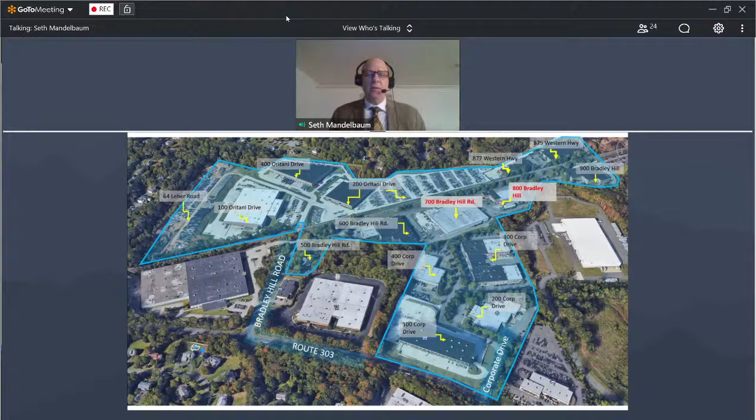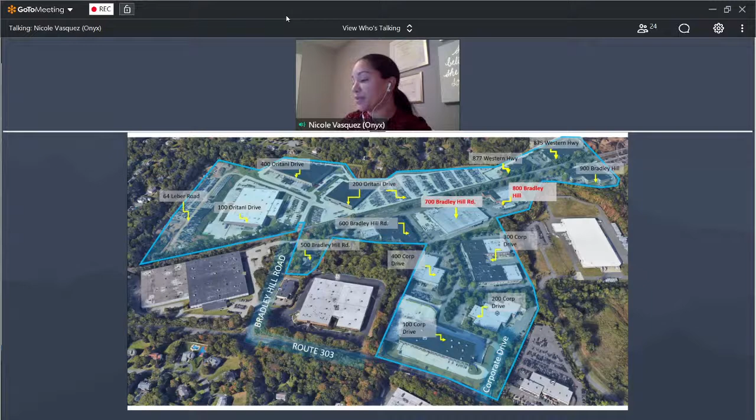Thank you, Seth. Again, my name is Nicole Vasquez, I'm with Onyx Equities. The two applications before you are for properties within the Hudson Crossing Industrial Park. The 700 Bradley property is improved with a commercial warehouse building currently occupied by Deman Motorsports and Oak Beverages. Deman Motorsports will remain as a tenant in the facility. Oak Beverages will be vacating, and UPS will be reletting part of the spaces that Oak currently occupies, as well as some of the vacancies that currently exist in the building.

800 Bradley Hill Road, currently occupied by Oak, is really only part of this application because, as you can see in the grayed out area here, the owner of 800 Bradley Hill Road will be granting an access and parking easement to the owner of 700 Bradley Hill Road, to the benefit of UPS. This slide also shows the existing conditions of the site. The application primarily proposes milling and paving and restriping, with a few ancillary modifications to the building, which we'll discuss in just a moment.

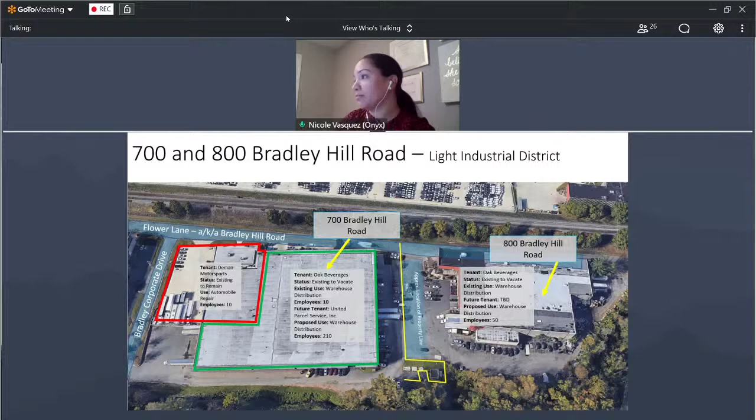This slide shows the distance of the 700 Bradley Hill Road building UPS will occupy to the nearest residential districts, with the nearest district boundary line approximately 430 feet from the boundary of the 700 Bradley Hill Road building. Similar data points to the south of the building and out to the east. Also important to note that the building is across the CSX rail line and across the 200 Orangetown parking lot before you get to that first residential district property line.

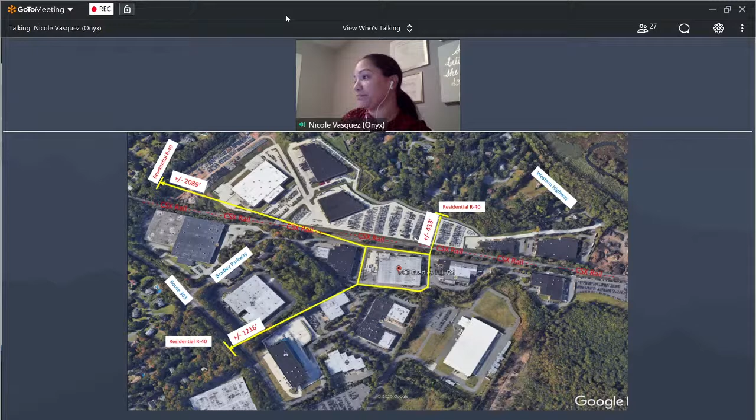As you can see here, these are the proposed striping patterns for both of the properties. The area in gray is the parking and access easement I spoke about a moment ago. In these clouded areas, we took into consideration AKRF's recommendations for some of the improvements, better clearance in the overhead door drive-in lanes into the 700 Bradley Hill Road building. We made some modifications down in the southern corner to allow for better maneuverability of the trucks into the existing loading docks, and some changes of swapping of spaces to account for the changes proposed by AKRF, which I'm sure you will hear about in just a moment.

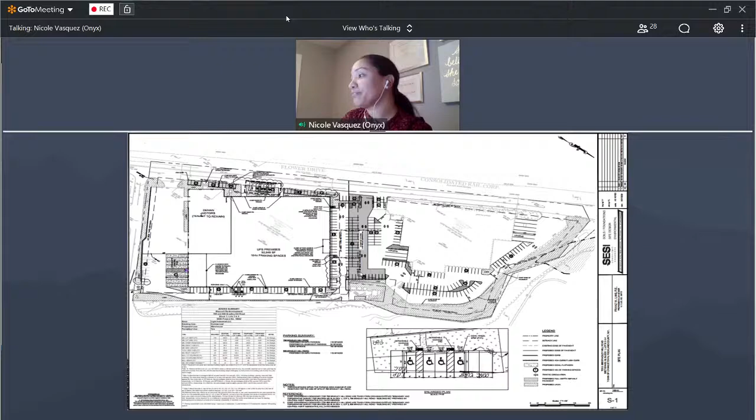Aside from the milling and paving, the other modifications we're proposing are removing a surface-mounted fuel tank, a site access gate, an extension to the rail spur on Bradley Hill Road, and replacement of the existing loading dock doors on the southern side of the building. These are the 8 existing loading dock doors UPS will be using, currently used by the existing tenant. No changes, no additions or subtractions of loading dock doors, just widening of the openings for UPS's use.

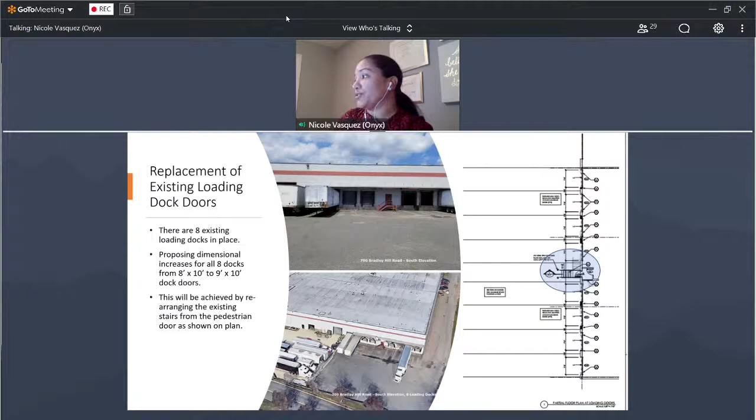And here is a rendering. Well, no, first an existing condition picture of the lot, and the rendering underneath showing the proposed changes once they're implemented as well.

And that is it. Thank you, Nicole. So, Chairman, essentially that is our overview. Of course, we're happy to answer any questions that the board or the public might have this evening. And we would ask the board to consider granting final site plan approval this evening at the end of the public portion of the meeting.

Thank you so much. Okay, thank you. Is there anybody else from 700 Bradley wishes to speak on this? No? Okay, so we'll go on to the consultants' reports.

Jane Slavin, February 8th, for 700 Bradley Hill Road. She has one comment.

Okay, Bruce Peters, February 8th, has 2 comments, which I want to read in, and we're going to need some legal clarification on this. Number 1, contrary to the applicant attorney's letter of 1/7/21, page 2, paragraph 3, it is not typical for applicants to wait until receiving final approval to address comments from this department, nor is it typical for this department or the planning board to allow an applicant to ignore comments made at a preliminary stage until after they receive final approval.

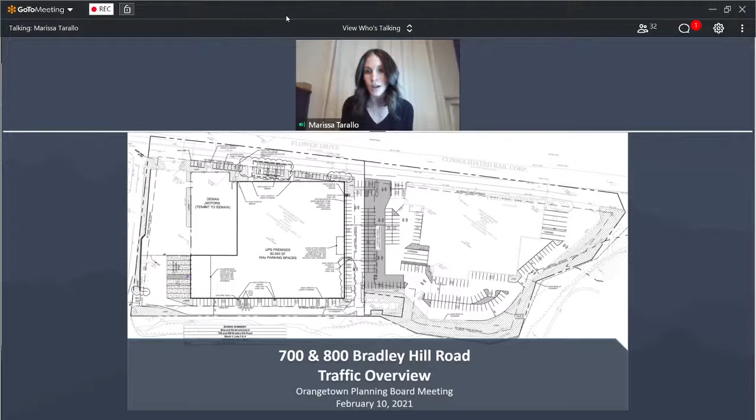And that's when we issued our second January memo, which signs off on the site plan. So I'll go through this quickly, you've laid this out. We've provided 2 reviews. The first review, we requested a revised traffic study based on our round of comments. They provided that revised traffic study, which we signed off on. We then got a subsequent site plan, and we signed off on that as well.

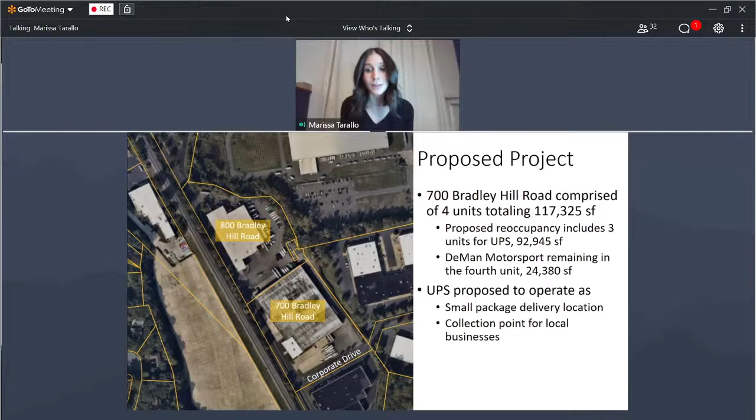The proposed site, they've introduced that to you. What's key for us is that the proposed operations are primarily a small package delivery location with an ancillary secondary collection point for local business.

They looked at 3 traffic study intersections. These 3 intersections are along the state route. They're the busiest intersections. They're very similar to what was analyzed for the Amazon facility as well. They used the same data collection previously approved under the Amazon site, which was collected during appropriate times, and we concluded that data was sufficient.

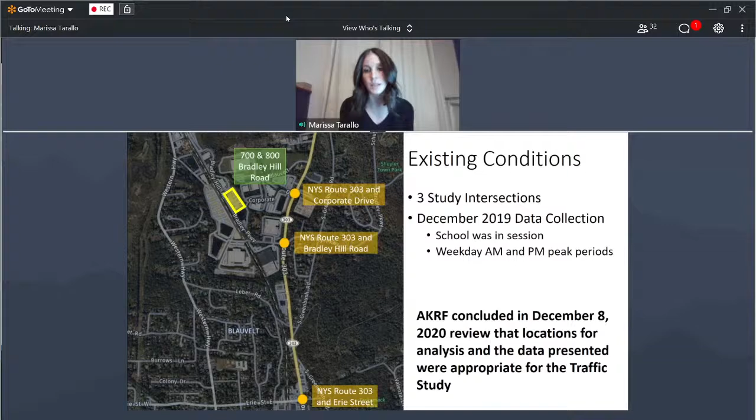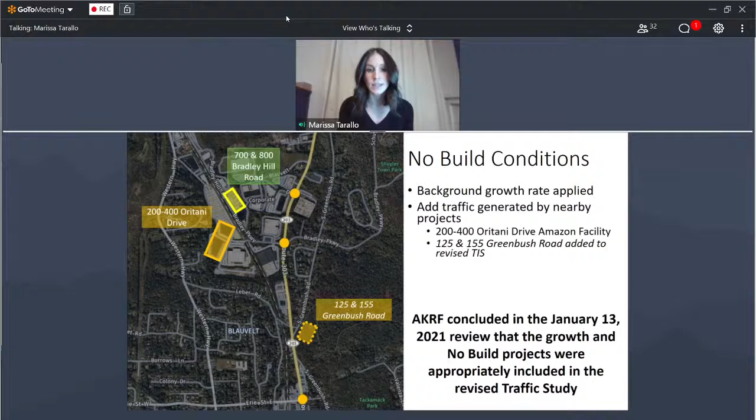For the no-build analysis, they applied the same background growth rate as the Amazon site, and added traffic generated by nearby projects. The original traffic study added Amazon, and then our response memo requested they add in the 125 and 155 Greenbush Road, which they added in their revised TIS. We then concluded in our secondary memo that this no-build project was sufficient.

There was some discussion about the trip generation. Unlike some of the other sites you're looking at with 155, where you're using ITE, UPS is a very specific use, so they provided a very detailed trip generation hourly throughout the entire day of vehicles going in and out. We checked that against the national average for warehouse facilities to make sure it's in line. In this case, it's more conservative than the national standard for a general warehouse, which is what we would expect with a UPS or an Amazon. So it was good data.

We asked for information about when people were coming in and out so we could line it up along their 24-hour distribution. As mentioned, they have a preload and then a delivery. The delivery is really what's going to start overlapping. The end of preload and the beginning of delivery overlap with your peak commuter hour in the AM. Then they've got staggered returns with less drastic vehicle volume, and then a local sort with no operation overnight.

One of the keys was that the ancillary package drop-off was part of our questions going into the final review. We had a conversation with the applicant's consultant right before we issued our final review, and the goal of that site is not to be the UPS store you think of, where you'd go buy boxes and send Christmas presents, with a lot of residents potentially frequenting it. It's supposed to be a collection point for local business, so they're only anticipating 25 customers per day. As long as that is the anticipated use and how they're going to operate the site, their trip generation is sufficient, and that's what we found in our memo.

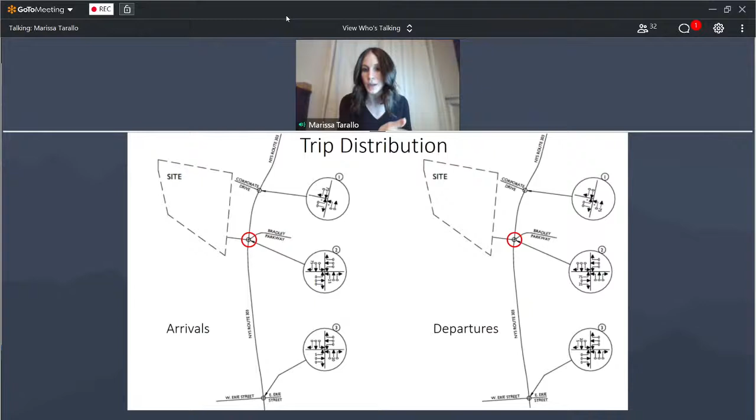They distributed the trips mostly from the north, with 3/4 from the north and 25% from the south. That's in line with the existing traffic and in line with all the uses in the area. This use is very similar, so it should really follow the existing patterns.

They analyzed it using all the latest methodology. We asked them to revise it for the volume of trucks, the percentage of trucks now on this roadway that they're contributing to, and they did that for both the no-build and build analysis. We also asked them to use the New York State DOT signal timing plans, which they revised for.

What's key - I know you mentioned you didn't get a comment letter from State DOT. We review everything to State DOT guidance, and we actually spoke with DOT about the signal timing plans to get them. Unfortunately, that's not the person who issues the letter to you, which is why you still don't have a letter. But they were kind enough to note that the signals are operational there and they don't have any immediate concerns that need fixing. Amazon is already upgrading one of the intersections, I believe at Bradley Hill Road, that traffic signal slightly. So the state was satisfied they had what they needed to operate with this development from an operations perspective. To my knowledge, it has not fully gone through their permit division separately.

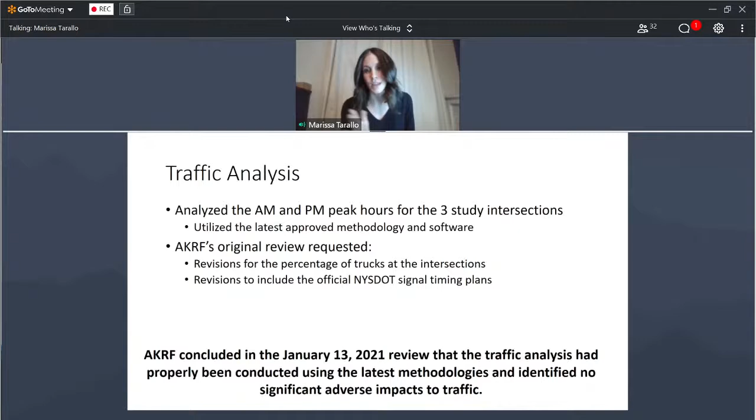We also asked for a crash assessment. This is standard on a state DOT roadway - it's standard that New York State DOT should have requested it. Mainly, we just wanted it documented for you. Route 303 is a very crash-heavy corridor, and luckily for the applicant, at the moment this is not one of the high accident locations along Route 303. I know it looks like a lot of crashes, but that's over 4 years, so it actually doesn't meet New York State DOT's criteria for a high accident location. But we want it documented and noted in all the studies so you can stay informed as to whether crashes are getting worse with added development over time.

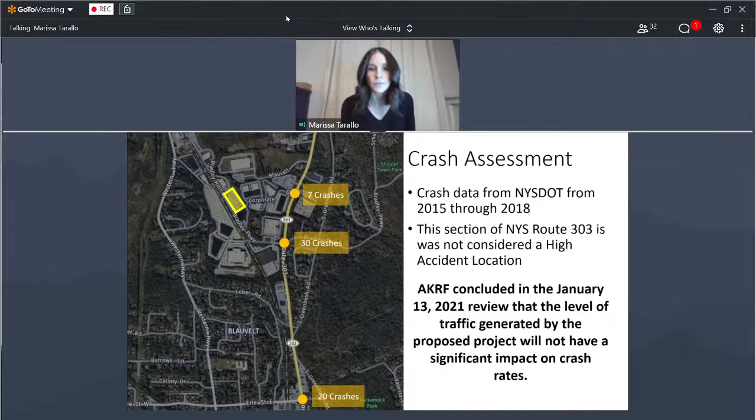And then we review their site plan and the truck turning analysis, and these are the locations we were concerned with. It wasn't so much that they were clipping the neighboring parking spaces, but particularly because the neighboring parking spaces to the two drive-in aisles had handicap spaces. We just wanted to make sure someone wasn't getting in their car when a UPS truck was coming out that might have been dropping off a package. So they widened that and moved some of the parking spaces back.

Also with their loading dock, they were extending the island in. Normally it's nice to have more islands, but in this case it was interfering with the truck turns. So they cut the island back, and now their truck turns are not in conflict with the islands they were going to build.

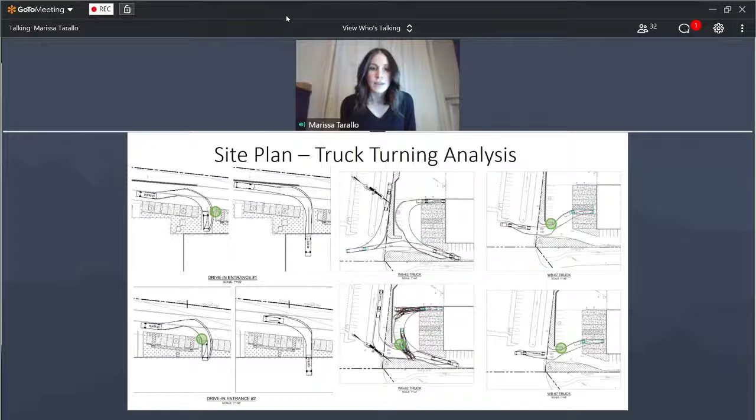And that's what's shown here, their revised plan that they bubbled in their resubmission to you on the 28th shows both of our improvement requests documented on their site plans that they'll incorporate. So our conclusions were that the traffic study was approved for our standards and New York State DOT standards that we follow, so long as the operations are as described, where you're not looking at a large UPS store where residents and others are coming very regularly for packages, and that there's no additional development on the site in 2026.

So I don't know if there's any questions. That's all I have regarding our memos.

I can see Mr. Dell has a question. Yes, let me go down. One second, Mr. Chairman. Marissa, can you stop sharing your screen so everyone can get the full view back? Yeah, great, thank you. Sorry about that. Thank you, Marissa. All right, great presentation, thank you very much.

Let me go down to all the board members and see if anybody has any more questions for you. Mr. Young? No comments, Mr. Chairman. Thank you very much. Mr. Mandel? No comments, Mr. Chairman. Thank you very much. Mr. Sweeney? No comments, thank you for the presentation. Thank you very much.

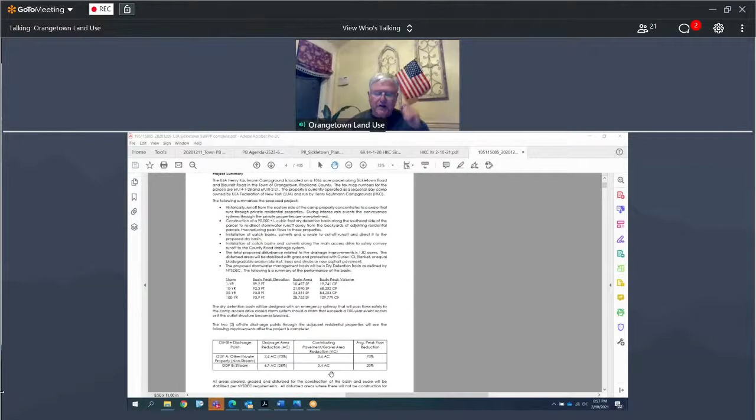Okay, well, let me go through the comments that we have, and I'll open it up to the board members, and you can answer their questions if they have any. Sounds good. Okay.

Office of Building, Zoning and Planning, Jane Slavin, February 8th - she has one comment. Bruce Peters, January 9th, has 13 comments. Drainage calculations have been provided that demonstrate potential significant impacts with respect to drainage have been mitigated. We therefore recommend that the Henry Kaufmann Campground Site Plan, Sickletown Road drainage improvements, be approved for drainage subject to the above project comments, of which there are 5. Rockland County Planning, January 20th, has 8 comments.

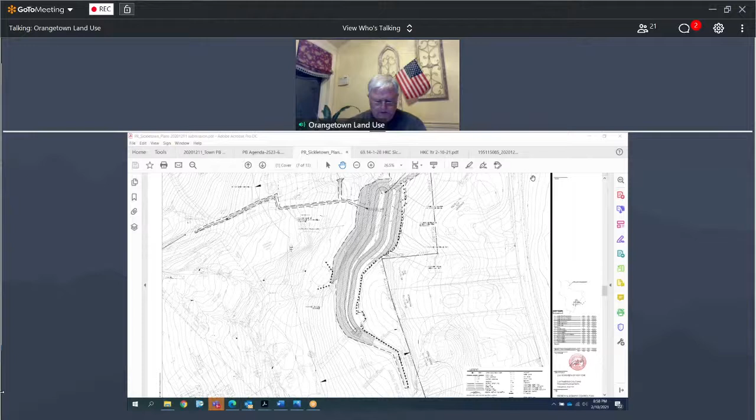I have a letter from Robert and Jacqueline Beers at 81 Sickletown Road. Regarding the drainage of the Kaufmann campgrounds, they state we have been flooded from the campgrounds since 1970 because of the runoff of wetlands that were made into ball fields, etc. Now that they are making a drainage retention pond, we should be included in that change. This is an environmental tragedy that has been occurring for many years.

I have a letter from Rockland County Highway Department saying no comments at this time. I have Rockland County Drainage Agency, dated September 17th, stating the review process is completed and this permit application file is now closed. I also have other letters that are not part of this, or have been satisfied - one from Rockland County Drainage, dated June 22nd, for 92Y and Camp 12 Trails. That's a different project, not this one. Yes, I understand that, I just got it. That's all I have.

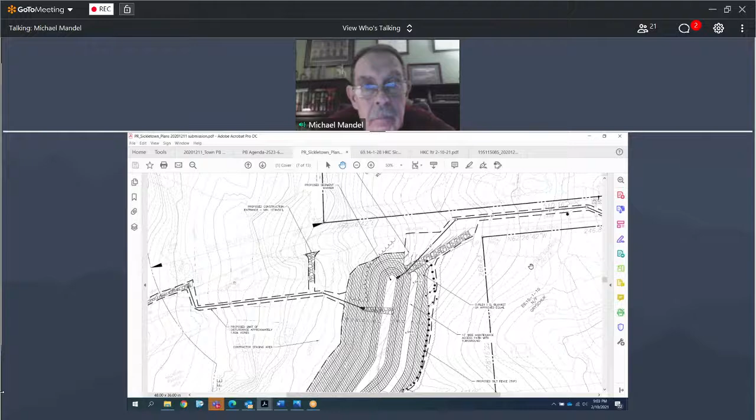Yep, this is an emergency spillway, which under conditions up to a 9-inch rainstorm should never see any flow of water. The purpose of the emergency spillway is in case there's a blockage of the main pipe network that discharges water through the pipe system into the county street drainage system. So this should hopefully never see a drop of water flow through it.

However, as you can see, we show this - it's basically a riprap lined trapezoidal swale that comes to the edge of, this is the main access drive into the camp off of Sickletown Road. So what Bruce has asked for is to show a little more detail at this connection point. He feels like we don't show enough detail that this water, if it were to come through here, would actually run down through this property here.

So he's asked for a little more detail here to extend the riprap and the contours to show that it, without a doubt, would be directed down the drive. Because that's the purpose of this - to alleviate any emergency flows in a controlled manner, down the paved driveway, which has an asphalt curb along it. So it would safely come down and flow into new catch basins we're putting in here at the street.

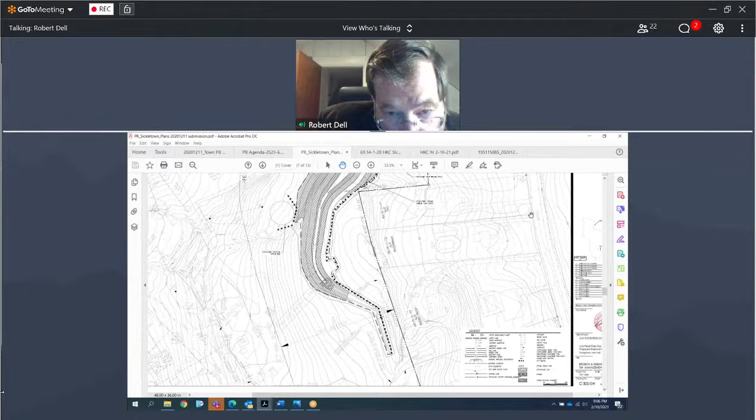Sure. If my reading of this is correct, there still is at least a swale the length of the De Beers property, or almost the length of it, that feeds into this. Is that not true, or am I wrong? That's correct, that's right. Okay, and what is the depth of that swale?

Approximately what, about a foot and a half? Well, it tapers to grade here, so this starting point is probably about a 2-foot swale. And then it increases in depth as you go, to 6 to 8 foot as you get into this area here.

This is an Army Corps regulated water course in this area here, and that's regulated for starters. And secondly, we looked at trying to divert more water from this area into this location, but then we end up overwhelming the system and sending too much water to the county's pipe up here.

I sort of understand what you're saying, but an extra 15 or 20 feet, I don't think would do that unless there's extremely heavy sheet flow there during rainstorms. Yeah, I think it's more - well, we can take a look at it, but you can see here from the contours. Even, let's say, throw a little bit of a berm or something close to it.

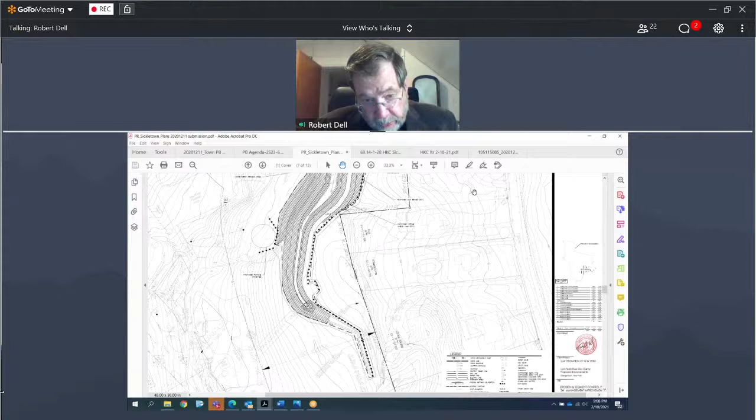The other thing is zero net increase in runoff. That doesn't mean you're going to get any less water from a flood. It just means during the worst times you're not going to get overwhelmed, but you're going to have more water coming through for a longer period of time than you would perhaps in another situation. I think you would agree with that, correct?

I'm not sure if I completely followed you. Okay, it just has to do with the definition of a 100-year storm. No, I agree with that.

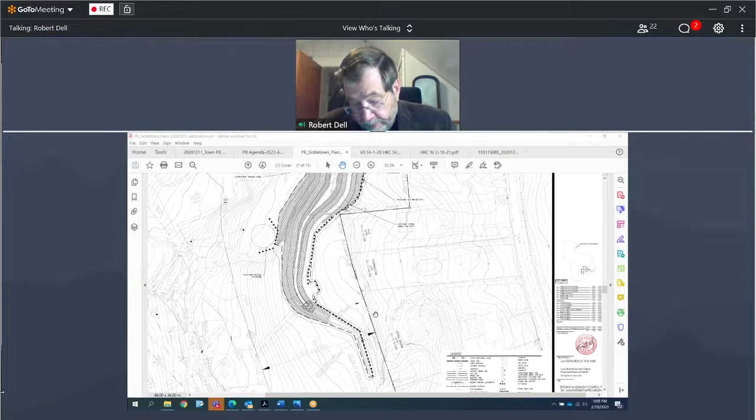And in fact, I explained to the board at our last meeting a couple months ago that DEC has updated their rainfall tables that we use for this, because a 100-year storm, for example, in this area, maybe used to be a 7.5-inch rainstorm. Now it's 9.0 inches of rain. So it's a fact that rainfalls are becoming more intense and higher amounts of rainfall. So DEC's already accounted for that to a certain extent.

Okay, and we'll see how long it takes them to update them again, basically. Yeah, right. But rather than having it all run across as a flash flood, you just have what could be described as high water for a fairly long period of time.

And that's the purpose of a detention basin: basically to capture the water, to hold it, and to send it out as a smaller orifice or pipe, which we're doing here. But instead of having a detention basin that lets it flow back through this location, we're actually redirecting it. So we're taking it one step further to send it in a different direction to a different outlet.

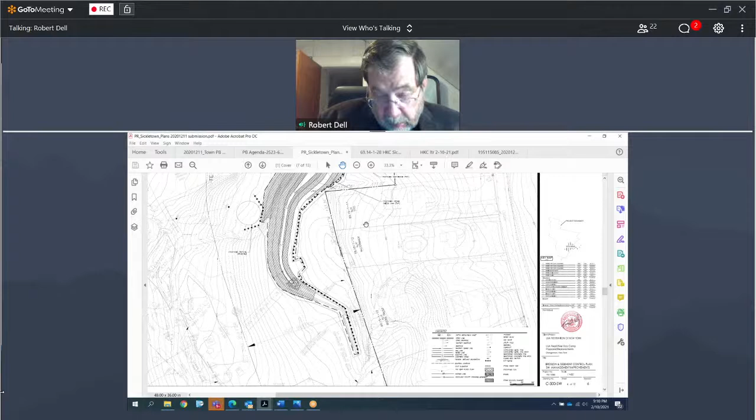Right, well, that's what I was alluding to. And of course, Peters' comments on the end of the riprap, I think, is certainly very accurate. Well, I think that makes sense. It looks like you've done a lot of work on it. It's certainly a lot further along than when it first came in. Thank you. Yeah, no, we're proud of it.

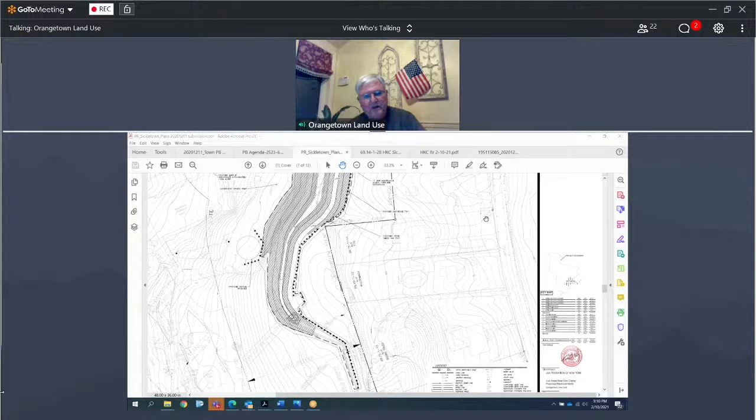Mr. McCrory. Thank you, Chairman. Just a couple of comments. You know, it looks like a lot of work and a lot of experts have chimed in about this plan.

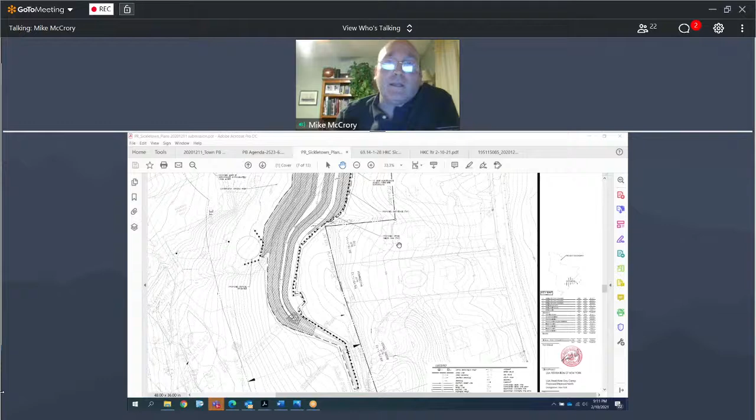But in a layman's kind of term, the flooding and the runoff issues to those neighbors - is this plan going to alleviate all those problems they had with the flooding?

It's not going to prevent them. No, it's going to hopefully lessen the frequency of those events and also the severity of them. Yeah, that's, you know, all right.

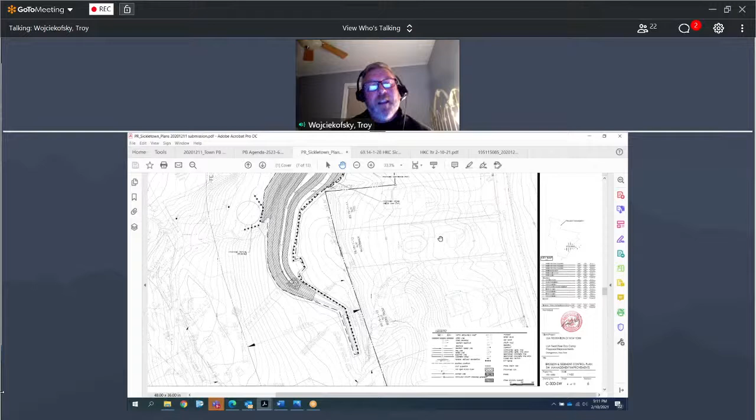The applicant, the campground, is spending hundreds of thousands of dollars to build this basin, unrelated to any of the other applications and projects we're doing at the camp. We want to make this as effective as we can, but in a situation like this you have certain constraints, like when property is landlocked by residential properties, plus other constraints including Army Corps wetlands, while also balancing maintaining wooded buffers to the neighbors.

One thing I did before we submitted this last time in December was meet with the engineer from Brooker to review this in detail, to explain all the different alternatives we looked at, as we presented to the board last time. We looked at other areas of the camp to put basins, other cutoff techniques, and quite a few different alternatives. I reviewed those again with the Brooker engineer who reviews the storm design, and I think he agrees we're doing the best we can here based on all the constraints against us.

All right, thank you for the answer. You're welcome. And just a last thing, you have no issues with Bruce Peters' 13 comments?

No, I call those cleanup comments. There's nothing serious technically with any of those comments. It's a lot of just cleanup, as we discussed, just cleaning up little details like that. We're comfortable with those comments.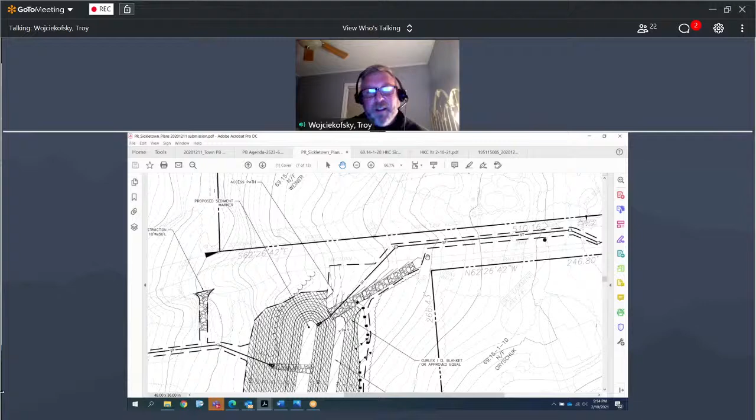Just a minor one, that's what we just discussed over in this area. He's talking about this area here. So we're going to show the riprap extended right to the edge of the road and make sure the contours show the water going down the drive. That's a little detail right there, not a change to anything else. The plans will change a little bit, but it won't affect the overall design.

No, not at all, not at all. All right, that's my only comments. Thank you. Thanks. Thank you.

Mr. Bond: I know Cheryl had forwarded us a picture of what looked to me like the entrance road from Sickletown Road, and on the right side of that entrance road there was a ditch. The picture showed that ditch looking like a river running down it right onto Sickletown Road. So is what you're proposing going to eliminate something like that from happening, or is that still going to happen?

Your microphone's off. That's on. Thank you. Not the first time I've done that.

Okay, sorry about that. So I pulled up one of the photos here that shows that ditch along the driveway, and there's substantial water runoff going down that ditch, and it looks like there's a 2x10 that runs along the driveway. Right, which is actually doing a pretty darn good job, to be honest. It's contained, but that's a ridiculous amount of runoff going down there.

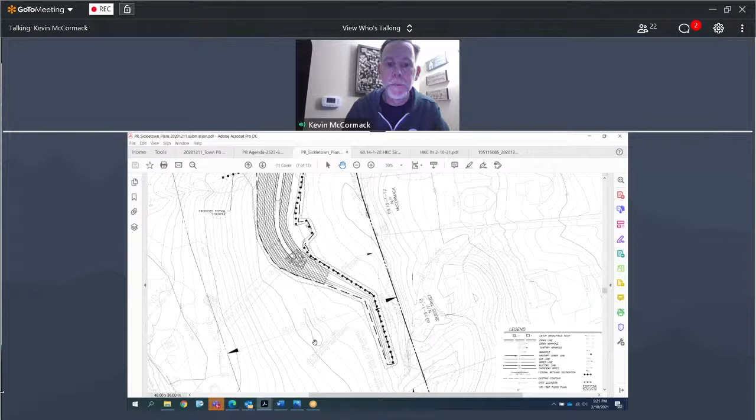More importantly, this isn't in Troy's paperwork here, but in the paperwork provided with the agenda today, I went through that, and there were two documents, two PDFs, which showed the tree removal for the basin project. On page 4 of the first document, it lists all the trees that are there and what trees are going to be removed.

One question we had was, it doesn't appear to have all the trees that are along our property on it. It just seems to have trees close to where the basin is going to be. We wanted to clarify whether the trees closer to our property line just weren't surveyed or not.

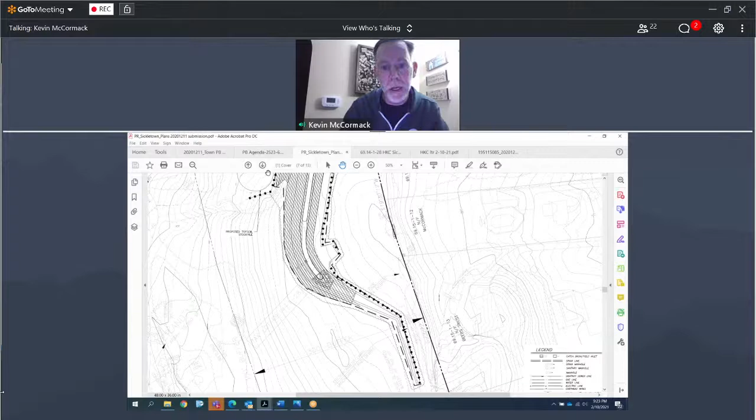But more importantly, there's a significant number of trees that are going to be removed where the basin is, behind the Tito property, the McCormack property, and the Beers property. I didn't count, but it's at least 25 to 50 trees, if not more. Yet there are no trees going to be planted behind those properties. So if we're going to remove that many trees, we would request that some be planted there to continue the look of the back of our properties, because there's only a couple of trees right in the corner of the Tito property.

I think one or two are going to be planted. So I think those were the biggest concerns that we had.

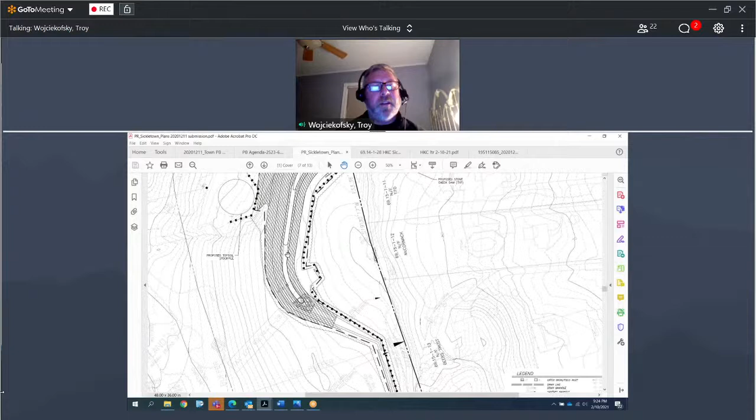The second question was regarding the trees. The town's ordinance requires us to survey trees of 8 inches and larger that will be removed, so we did not survey all of the trees. For instance, in this area, we focused on just the limits of disturbance that would be impacted by the project. So there are certainly more trees in these areas that you can see my hand in right here.

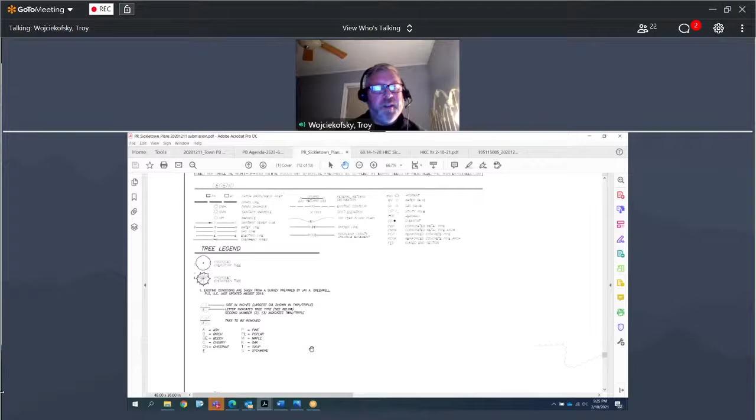These circles are existing trees that were surveyed, 8 inches or larger caliber. These darker symbols are the proposed plantings as part of this project. I can show you the types: we're planting ash trees, birch, beech, cherry, chestnut, pines, poplar, maple, oak, tulip, and sycamore. All of these are proposed trees. We focused them on the upslope area as well as the downslope areas, thinking those would be the most effective places.

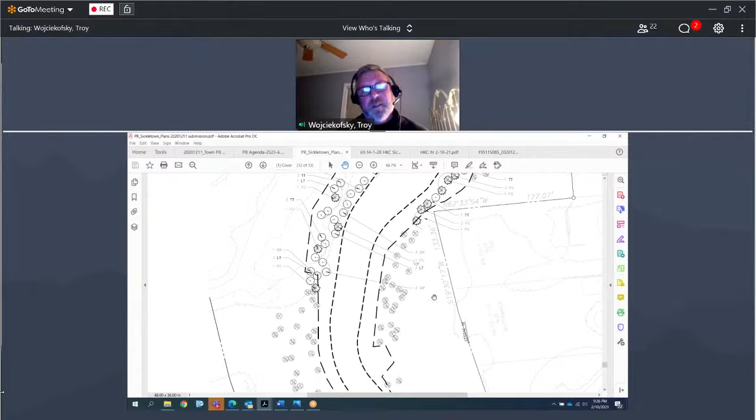We're not allowed per DEC requirements to plant trees within the basin, and we cannot plant them directly on top of the berm because that's used for access for maintenance. So we have trees planted on the side of the berm and on the side slope going up to the top. We have 70 trees proposed to replace the trees we're removing.

The other questions? Excuse me, Troy—could you bring up the other document that shows all the trees that are going to be removed? Sure, that would be our existing conditions, number one of the two. Let me grab that.

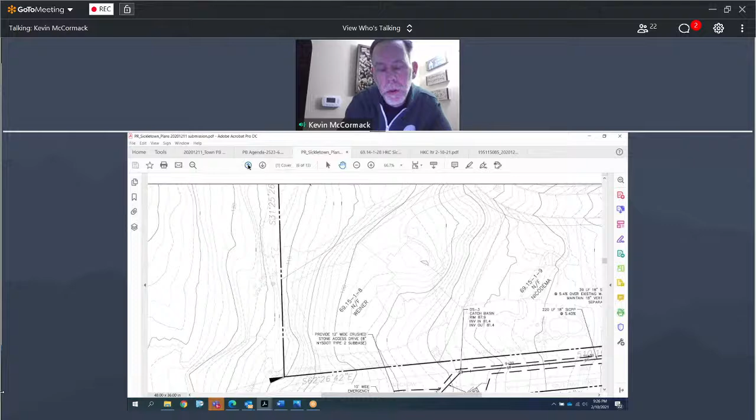Okay, so this is the removals plan. All these with the X's are the trees to be removed. And then you can see the lighter ones are existing trees that were 8 inches or larger.

Let me ask you a question: roughly how many trees are going to be removed? Approximately 130 trees. And how many are you going to be replacing? 70. Okay.

Now, I don't know if you can, but is there any way you can do additional planting in the area between the catch basin and the property owners to the side?

Sometimes we'll put a note on the plan, if the town's okay with it, that we can adjust the locations of the trees to be strategic based on view sheds. There are existing tree areas within the properties of the neighbors, and of course we're trying to preserve as much as we can on our property as well. We've done that before, where we can work with the neighbors—if a tree shown here works better moved over there, we can do that. But within the area of the basin itself, we're limited to grasses and things like that.

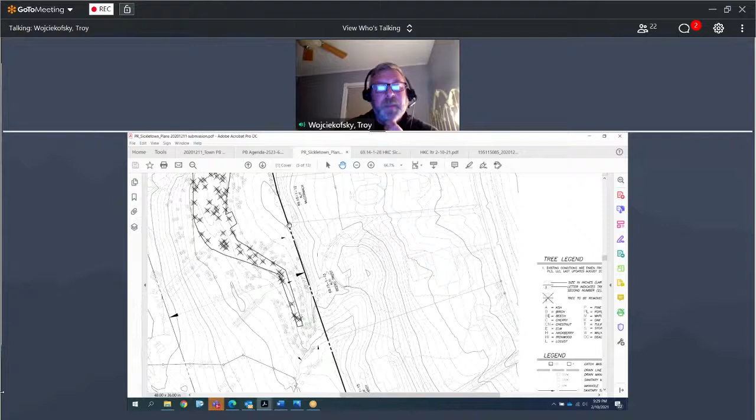All right, thank you very much. I have a question, Mr. Andrews here. Yes, Mr. Andrews, go ahead.

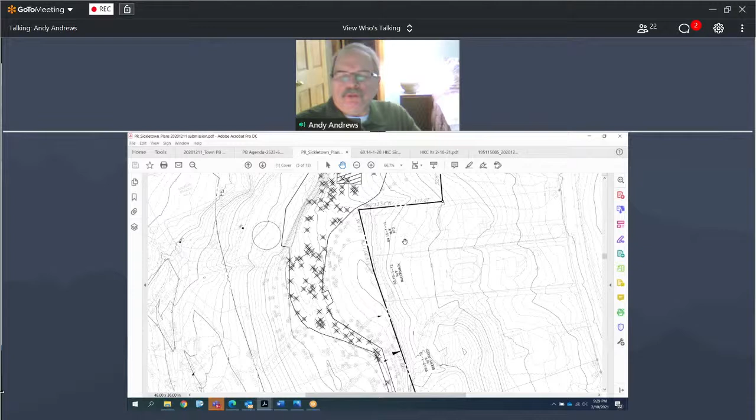Can I ask why, or how many ash trees do you propose putting in? I saw it on the list but didn't see a number. Now you're testing me, I don't know if I have it, I might have to count quick here. The reason I'm asking is because ash trees now have a disease, and I don't think it's under control. A lot of ash trees are dying off.

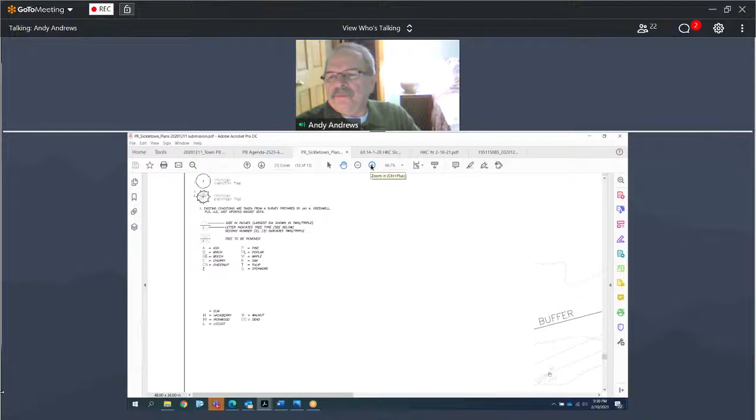Is this local to Rockland County? No, all over the state—it's in Pennsylvania, New Jersey, it's all over. Ash trees have a tendency to get this disease and die off. I'm not sure if they'll die off when young, but if they become mature, which is the hope, there's a possibility they could die off if nothing is done about the disease.

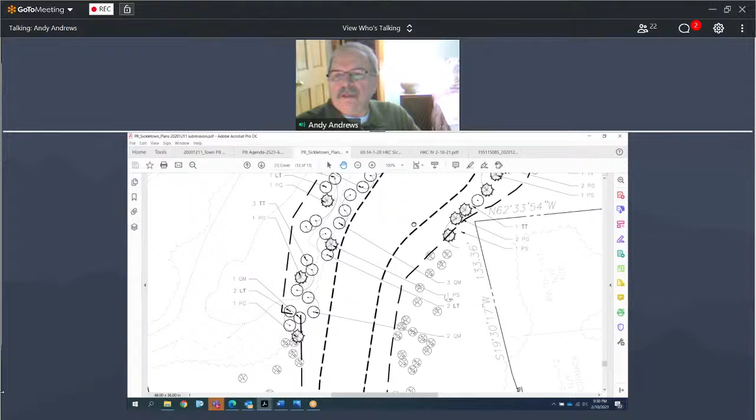And the other question, I'm sorry—I noticed there's a lot of deciduous trees you're going to plant as opposed to evergreens, which would actually act as a good buffer between the neighbors.

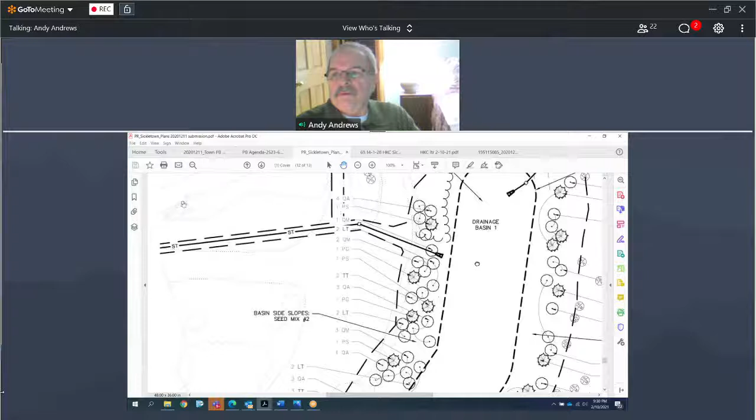Our landscape architect designed this, so I'd have to ask her about the ash tree. Just looking at the symbols, I'm not seeing too many, because the symbol for the ashes was just a single A, I think. So I don't know.

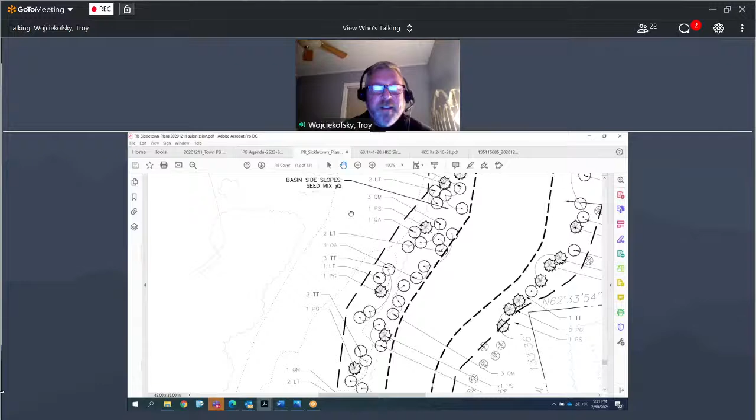Well, if it's a problem we can always substitute them. We could substitute if the supplier of the ash tree is in agreement about this disease. There's no reason why they can't be replaced.

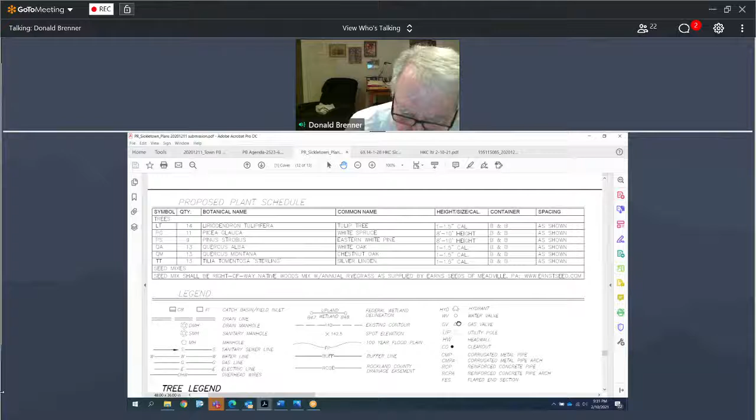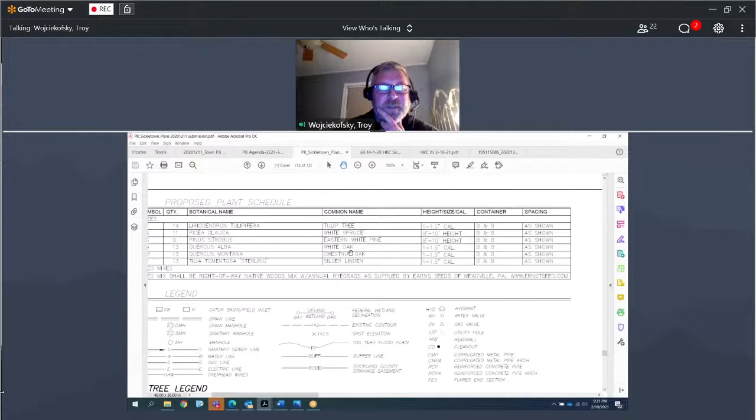Oh, I'm sorry, I misspoke actually. I apologize for that—these trees are the trees to be removed. I apologize, these are the proposed trees up here. Oh, I see, okay, that was my mistake. So we have the tulip tree, the white spruce, eastern white pines, white oak, chestnut oak, and the silver linden.

Okay, all right, that looks much better, so no ash tree. I guess that helps me out that I made that mistake. Yeah, all right, thanks a lot, Troy. You're welcome. Okay, anybody else from the public that wish to speak on this project?

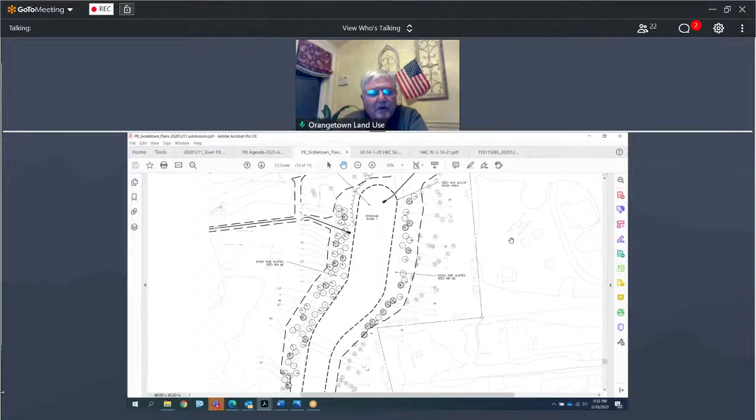One more time, anybody else from the public wish to speak on this project? Okay, can I have a motion to close the public session? Mr. Chairman, may I, motion to close. Kevin, you've already spoken, I'm sorry sir. Thank you, but they didn't answer the question. Motion to close the public portion.

Okay, who made that motion? Mr. Mandel made a motion to close the public session. Do I have a second? Andrew seconds. All in favor? Aye. Any opposed? Okay.

I believe that the applicant has done an excellent job on this. I think we can move on with this.

Can I have a motion for lead agency to reaffirm SEQRA? Motion for lead agency. Okay, Mr. Mandel, do I have a second? Andrew seconds. All in favor? Aye. Opposed? None. Okay, thank you.

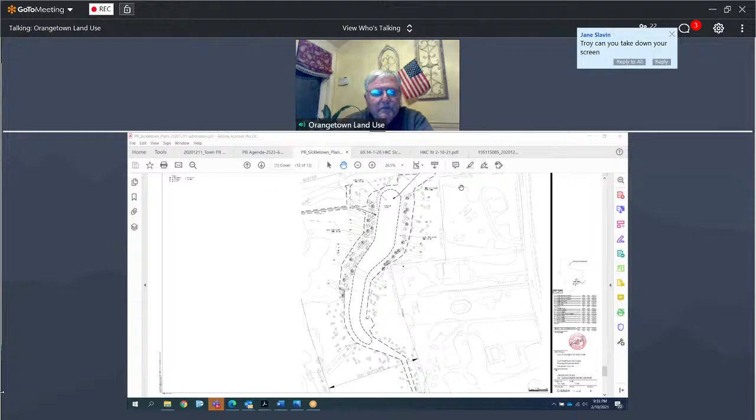Motion for lead, negative declaration? Motion for lead neg dec. Okay, do I have a second? Andrew seconds, thank you. Okay, all in favor? Aye. Opposed? None. Okay.

Troy, could you do me a favor? Take down your—thank you very much.

Okay, can I have a motion for final with conditions? Motion for final with conditions. Mr. Mandel, thank you sir. Okay: Jane Slavin, January 8th, item 1. Bruce Peters, January 9th, item 13. Booker Engineering, January 9th, item 5. Rockland County Planning, January 20th, item 8.